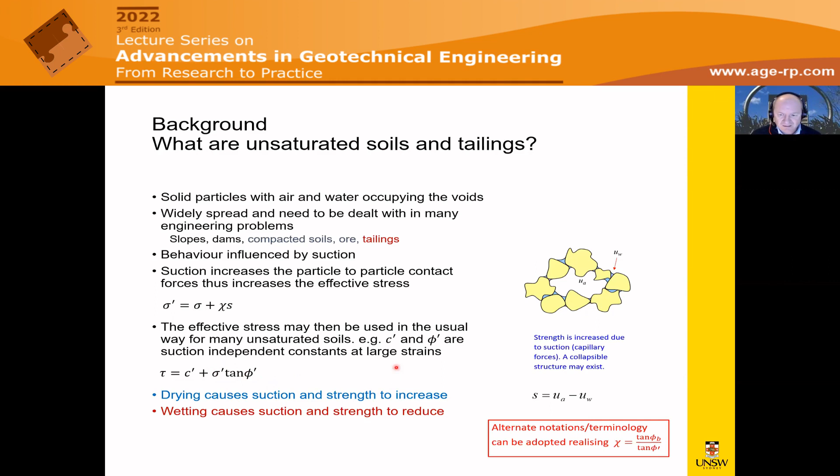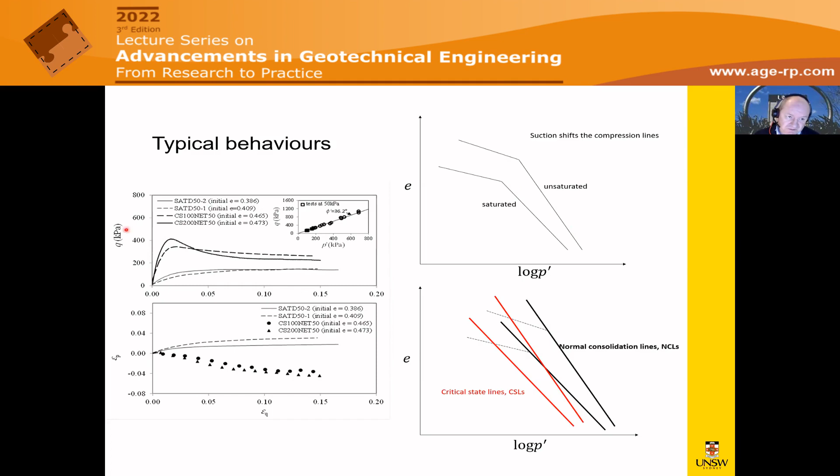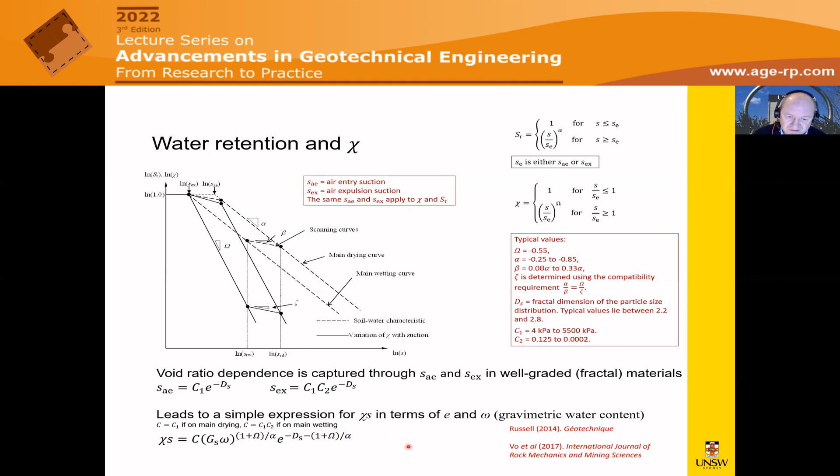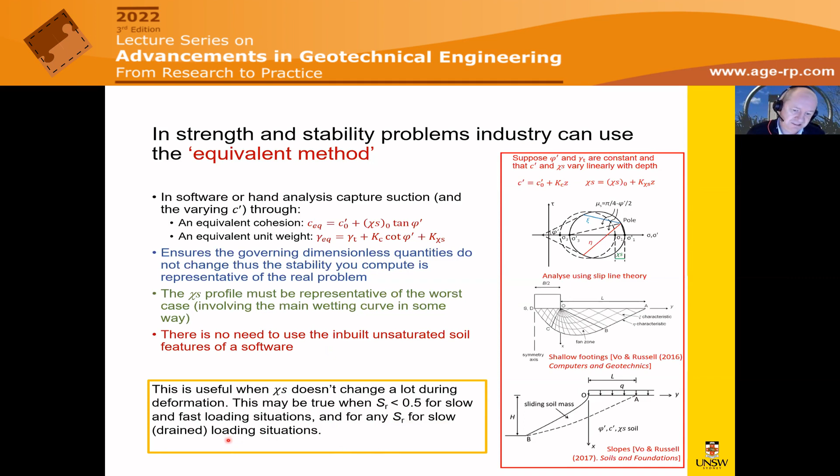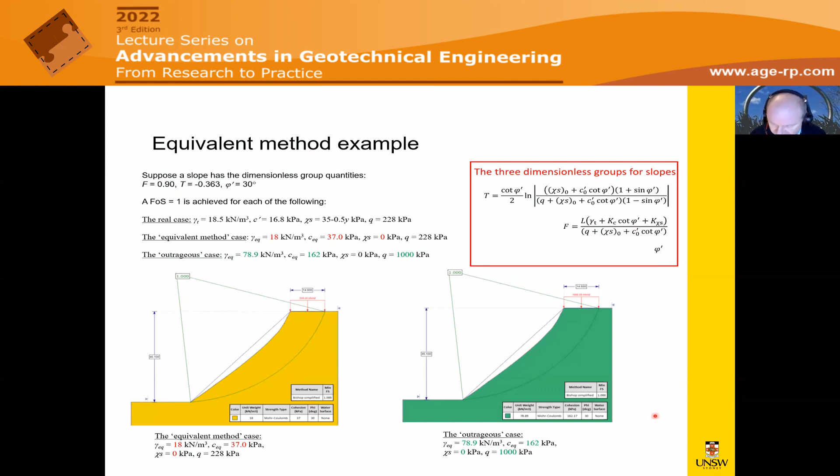And we can even put in an outrageous combination of properties. Here, the unit weight's nearly 79, the cohesion's 162, the surcharge has changed a lot. But all these 3 sets of numbers satisfy these 3 dimensionless quantities up here. And when you do your slope analysis, you get a factor of safety of 1, irrespective of which set of properties you use. That's because those dimensionless groups are preserved, highlighting that this equivalent method is a perfectly physically acceptable way to capture the effects of partial saturation in these strength and stability problems.

Now, back to the main topic. Why address the cone penetration test in unsaturated tailings? Well, large sections of a tailings storage facility are unsaturated. There might be sections deep within the structure where it is desiccated in the past and new tailings has been deposited on top, but it's just simply flowed over those dried out sections, and you still have these pockets of partial saturation. Or you can have large desiccated regions above the phreatic surface as well.

Very little research has been performed on how to interpret in situ tests of these materials, but I've spent the best part of 20 years looking at how to handle the CPT when we push through unsaturated materials. We know suction influences the CPT results a lot and must be accounted for.

And it's very important to account for suction in stability analyses and assessments, especially with tailings where the margins of safety are not high and the budgets required to retrofit and upgrade them are huge. So a little bit of factor of safety goes a long way financially, as well as from a risk point of view. It's important to remove unnecessary conservatism to keep costs down and attain slightly higher factors of safety, but also it adds confidence to your analysis. And we all know that how confident you are in your parameters dictates how low a factor of safety you might rely on when you present it to regulators.

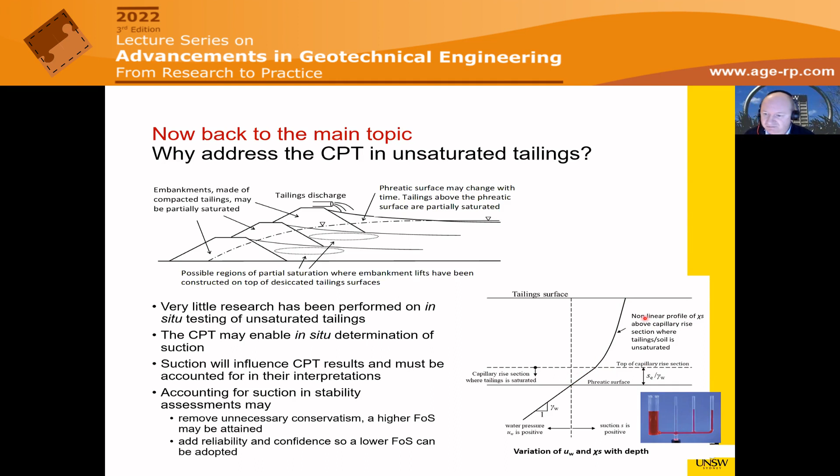Now let's go to some CPT observations. This is what we know for a clean sand. This is done a few decades ago now in a very basic calibration chamber, pushing cones into a sand in saturated and unsaturated states and so on. And you can see when the degree of saturation was around 0.1, your cone resistance is essentially double that for the saturated state. Very early evidence.

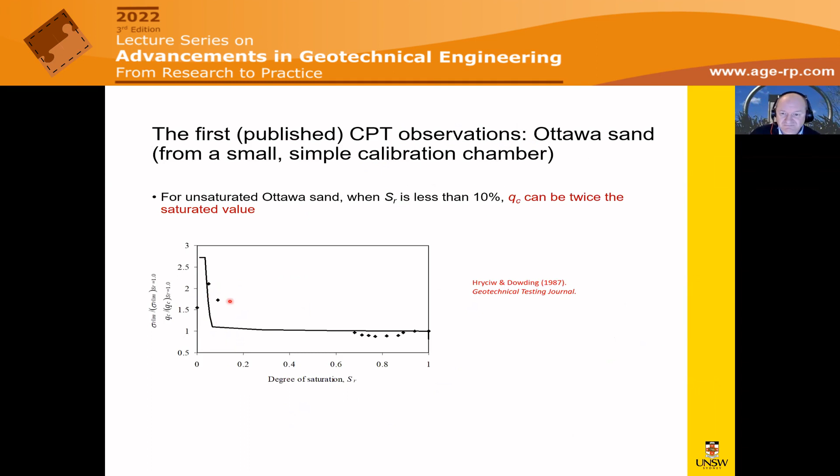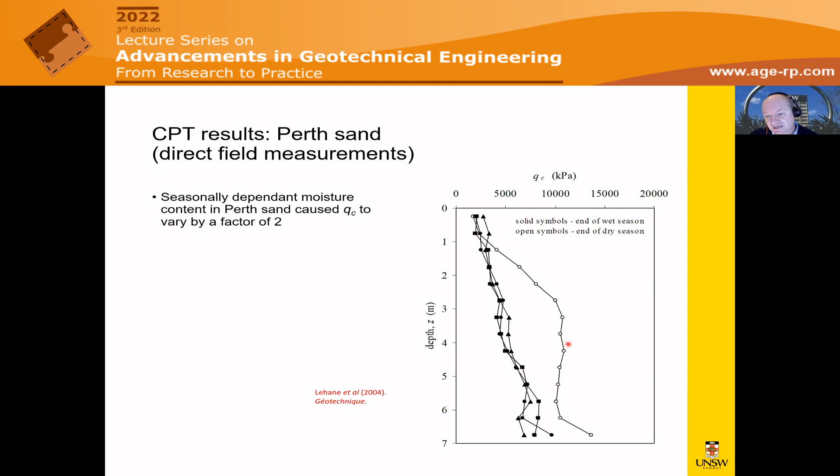We then go to Perth in Australia here, some field studies at the end of wet and dry seasons at a sand site where there's up to around 5% fines in that sand. At the end of wet season, all your CPT data is down here. At the end of the dry season, we've got a significant suction present in the sand, causing the cone resistance to double, more or less.

This is some work we did at UNSW in our calibration chamber, looking at sand in saturated and unsaturated states. Again, over on the left, you can see how your cone resistance, this outer sort of black line, is much larger for that unsaturated state compared to what it is for the saturated one over here. It's particularly pronounced when your confining stress is very low, but it's still evident when your confining stress is up to 100 kPa, your unsaturated results are still markedly different from your saturated ones.

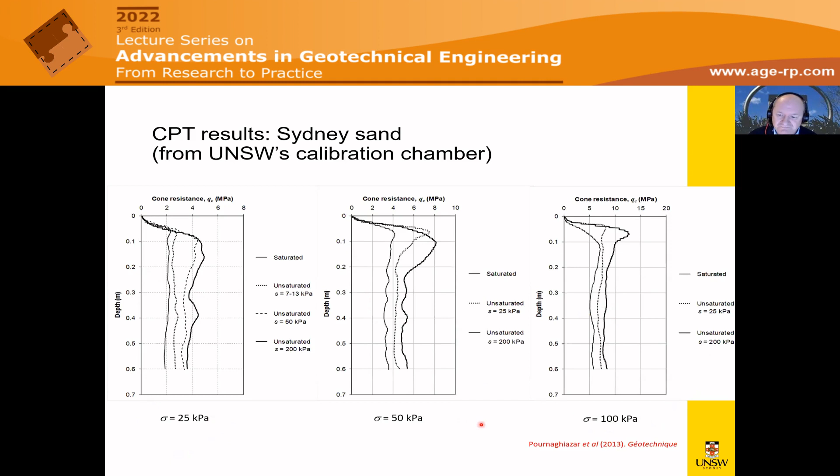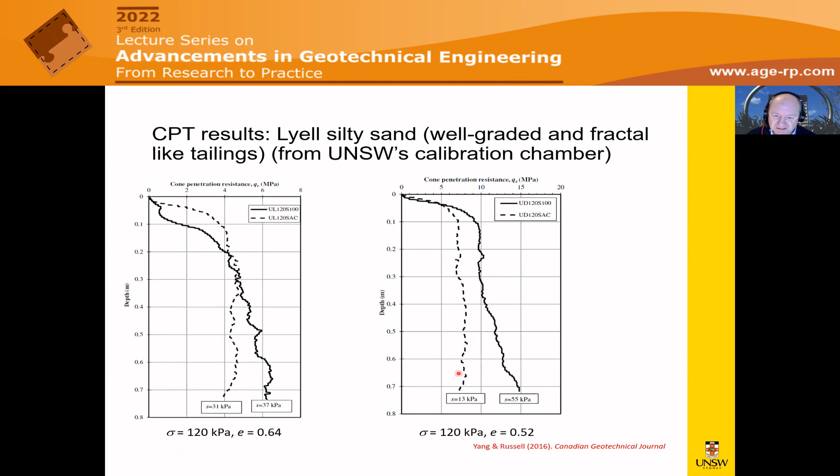We've done the same for a decomposed granite. This is very much like a tailings, a very well-graded sand silt mixture, perhaps a little bit coarser than tailings, but again, suction as it increases causes a rise in your cone resistance compared to the saturated value or the lower suction value.

Now let's talk about drainage. This is one of the key learnings that I hope you take away from today. Look, when we push things into soils or tailings, or when they deform, we need to make some assumptions or statements around what's happening to the pore water pressures.

Drained conditions will be great. It means that suction is constant, or even better, chi-S is constant. In other words, all the pore pressure parts and their contributions to the effective stress essentially don't change very much. But the most realistic scenario is that when we push a cone into the tailings or the soil, the moisture content is constant. It happens fairly quickly. There's not enough time for water to drain in to or out of the tailings.

So we analysed an expanding cavity in the soil to explore these different drainage conditions and what it does to the cavity wall pressure, which is analogous to the QC, the cone tip resistance. And we found a very useful discovery: the constant Chi-S assumption is a pretty good approximation to the constant W condition. The errors are always less than 30%, and mostly, overwhelmingly, less than 10%. So it's a pretty close approximation without big practical consequences, even though it's not perfectly true.

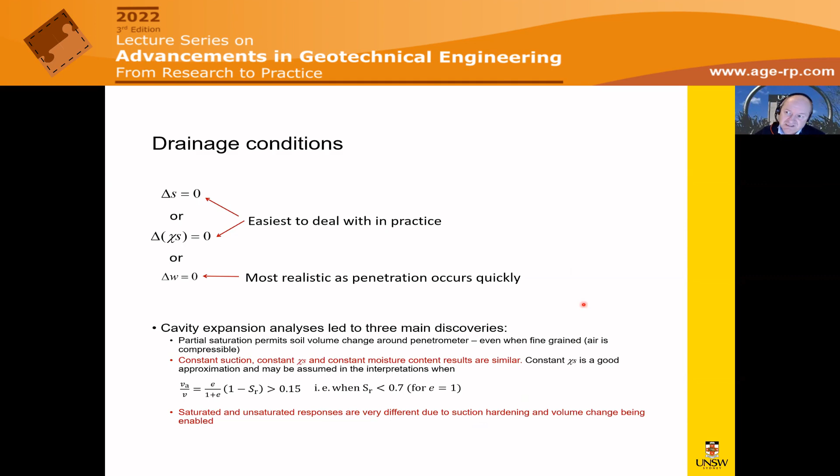So this is an interpretation of the Sydney sand data. This sand doesn't really have suction hardening. If it does, it's very, very small and can be ignored. And it means that all our saturated, unsaturated, and dry results essentially obey the same trends.

And we can link cone resistance to our mean effective stress in a power law, for example, using this Baldi type expression. That's all the data overlaid up here fitting that power law for two different relative densities. There's a mixture of saturated and unsaturated there, all agreeing the same relationships.

We could alternatively use the state parameter approach of Been, Jefferies and co-workers and adopt this sort of exponential law in terms of state parameter. Again, all your saturated and unsaturated data would obey the same trend. Now, these look very different, these two expressions, but they're actually essentially the same thing when you have drained conditions around a cone. You can introduce your critical state parameters and sub in the expression for the state parameter, rearrange, and you can show that this power exponent on P is actually 1 minus lambda m when you go to this Been-Jefferies type approach.

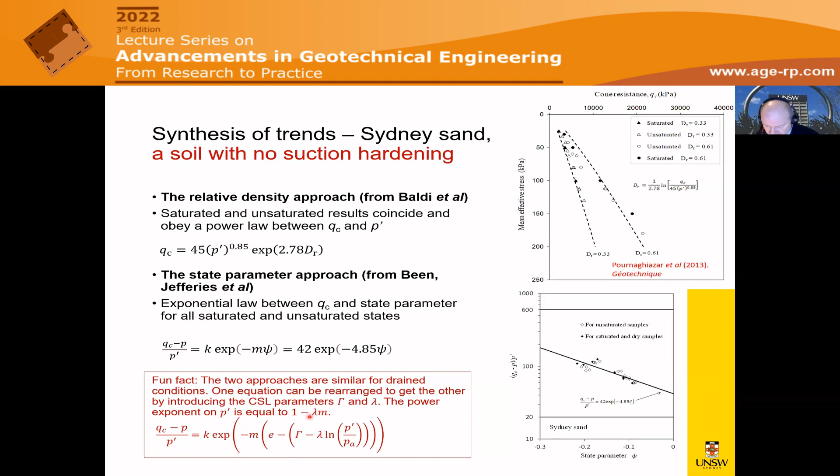Now, again, in this clean sand where there's no suction hardening, we can do some very powerful things with our cone results. We can relate two cone resistances at two different locations using just a ratio of the effective stresses, which are present when raised to that power. So we can put in Chi-S parts to account for the different suctions that might be present at two different locations. This is only true when the void ratios are the same.

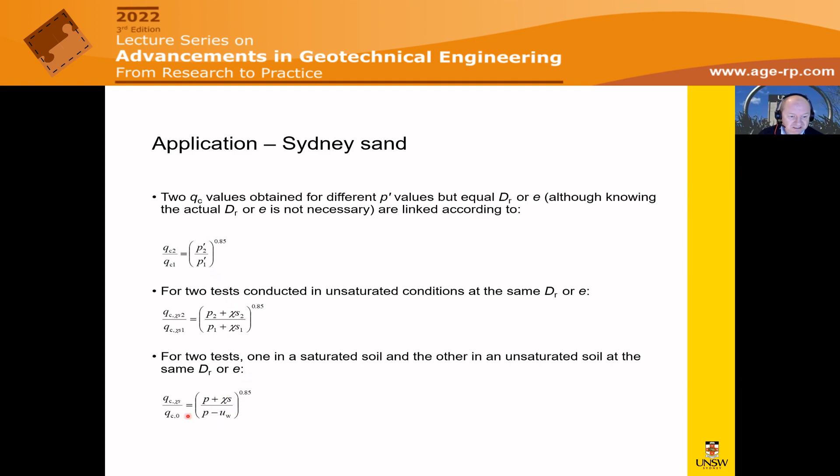We can even interrelate dry, saturated, and unsaturated results. So here's a little example. Given some basic information about the test, about the Sydney sand, we can suppose that a cone resistance of 4 megapascals was obtained. Let's now suppose that the total stress—the mean total stress—is 25 kPa and Chi-S is also 25. So doing things properly, computing your effective stress will give you 50 kPa. Subbing in the various expressions, you get a relative density of 0.42, friction angle of 39 degrees, soil behavior type of 1.6, and so on.

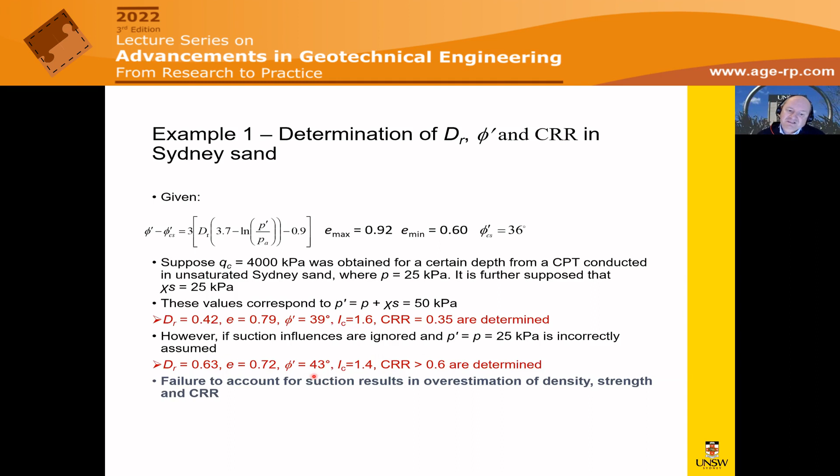But if we ignore suction, making no attempt to account for Chi-S and incorrectly suppose our effective stress is our total stress, which is 25, we would overestimate our friction angle by 4 degrees, overestimate our relative density or underestimate our void ratio by quite a bit, and so on. So here, failing to account for suction leads to unsafe predictions as well.

Another example, at the Perth sand site, we can interrelate the cone resistances essentially at the end of wet and dry seasons. At the end of the wet season, I'm setting the pressures to 0—there's still a small suction present, but it's all at 0 or close to it—compared to the end of the dry season. Interrelate them, and you can back-calculate the Chi-S value at the end of the dry season when you've got two sets of data side by side.

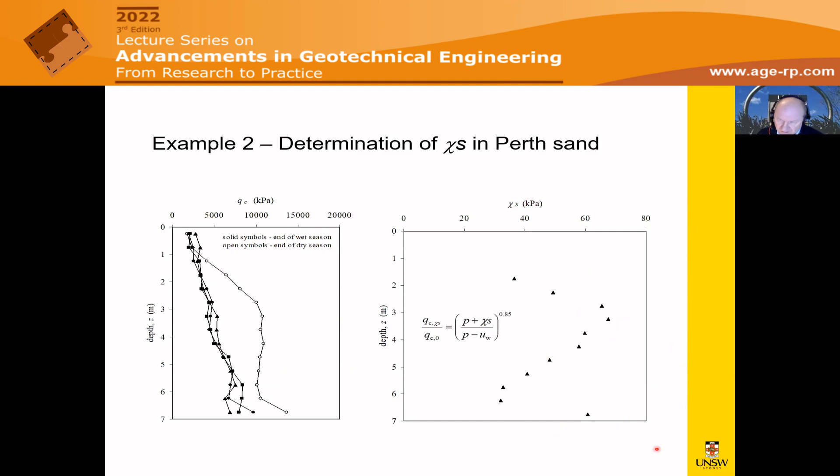Now, when we add fines, we start to get a very pronounced and unignorable suction hardening that we have to account for. And in an unsaturated state, we still get a nice power law relationship with our mean effective stress, but that relationship won't apply when the soil is saturated. So we've got two different types of responses now around the cone, and that's due to the presence of suction hardening.

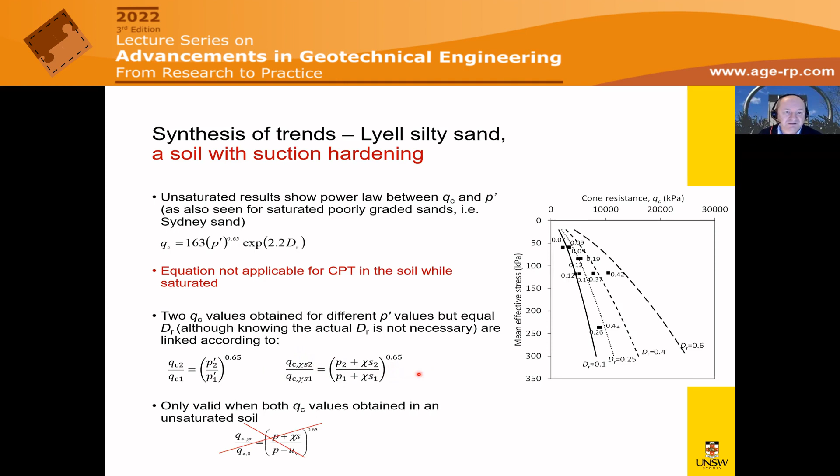It limits a little bit how we can then interrelate different sets of cone results. We can only interrelate them when both sets are from an unsaturated case, using a similar approach to Sydney sand, but we can't now mix in the saturated ones because of the different laws which apply. But there's some implications when we attempt to classify as well, using these well-known charts.

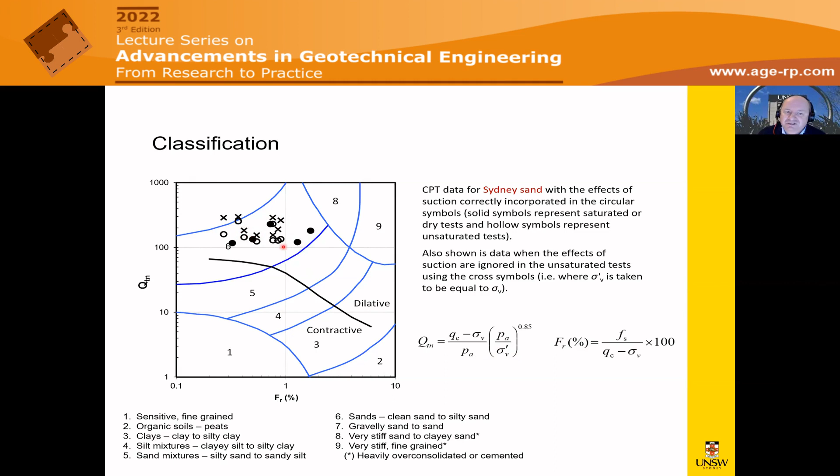The effects are not so pronounced for the Sydney sand, and I'll demonstrate that here. So the solid circle symbols are saturated. The open circle symbols are unsaturated, but correctly plotted. This is the Q term. Notice that there's an effective stress on the denominator here, so chi-s has been included in that properly. I've redrawn the data, but when the chi-s part is assumed 0, or in other words, when the suction is ignored, you see the crosses now are wrong, but they're plotting slightly above what the open circles do. It's not a huge difference for this particular soil, but for other soils it can be.

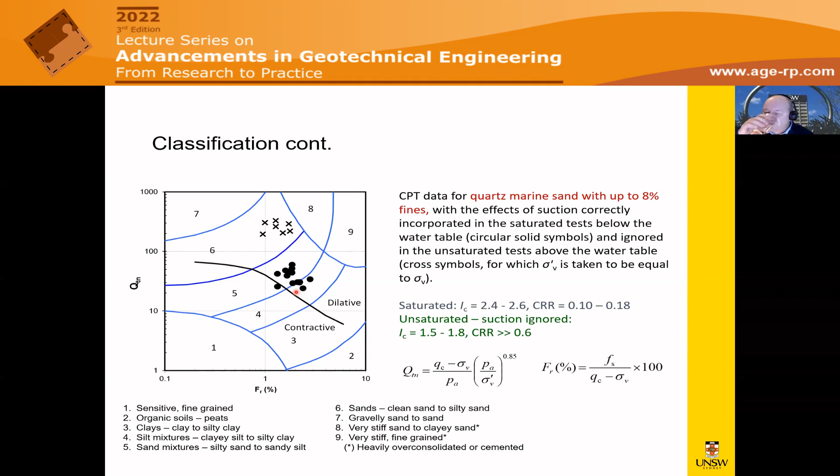And this is a quartz marine sand. Here I've done the same things. Saturated results all nicely and correctly plotted down here with the black closed symbols, showing slightly dilative material bordering between 4 and 5. Now, in the unsaturated case, suction was ignored, but look where the data's plotting. It's the same soil, but now it's plotting as a soil 6. It's looking to be very, very dilative, but we know that if it was to become wet for whatever reason, it would be down here where these black dots are, bordering like dilative, contractive. So you get things badly wrong with your classification.

Okay, so now on to tailings.

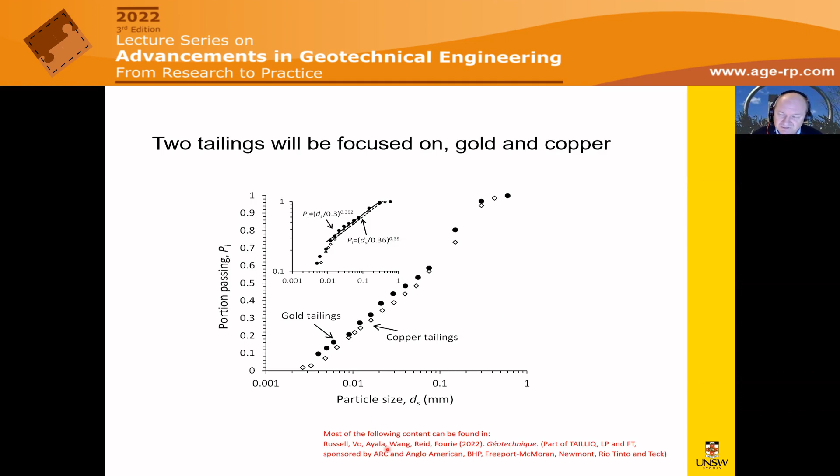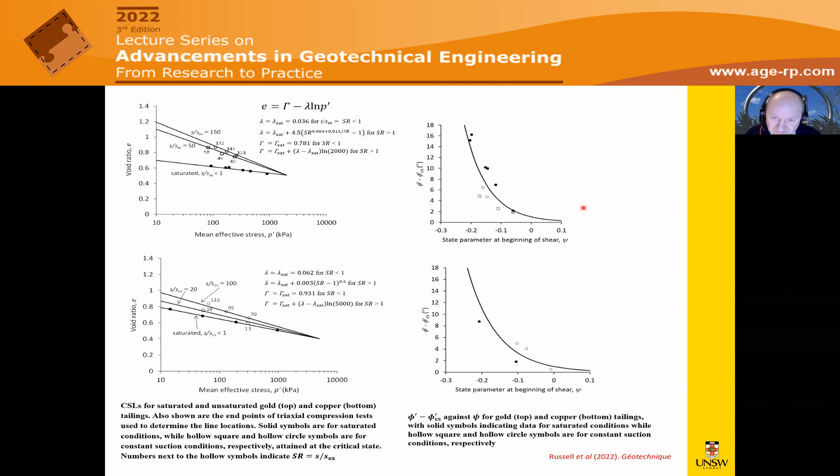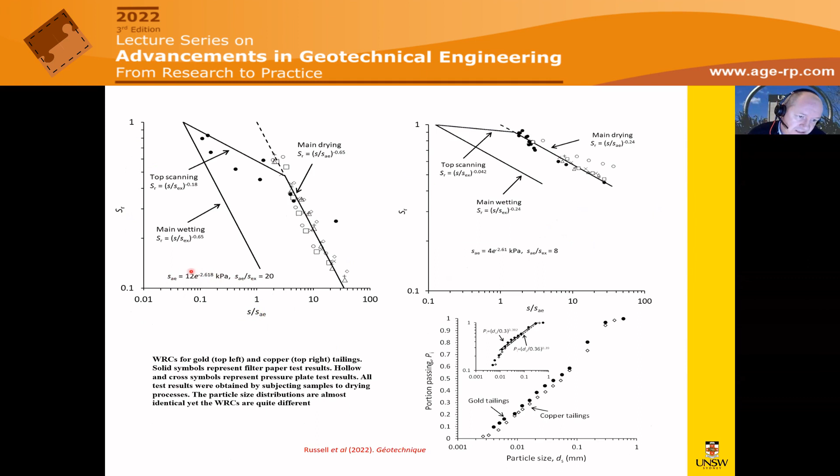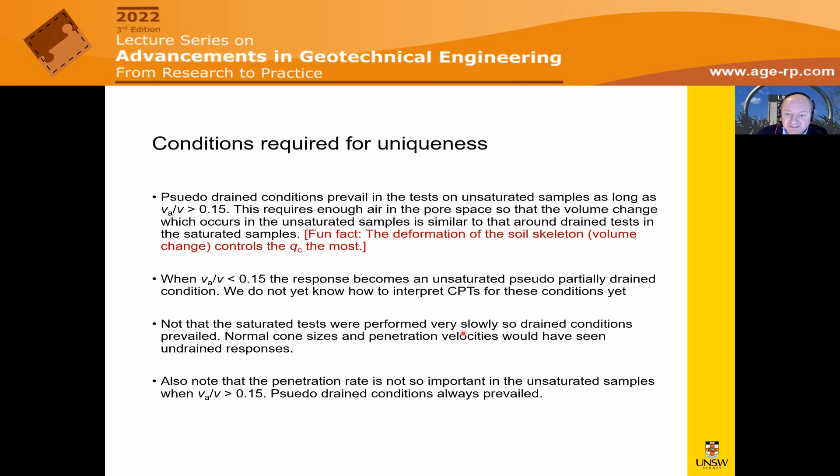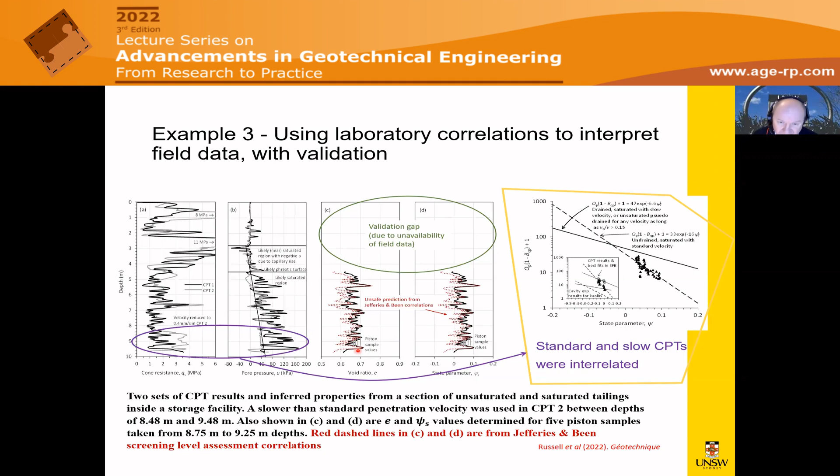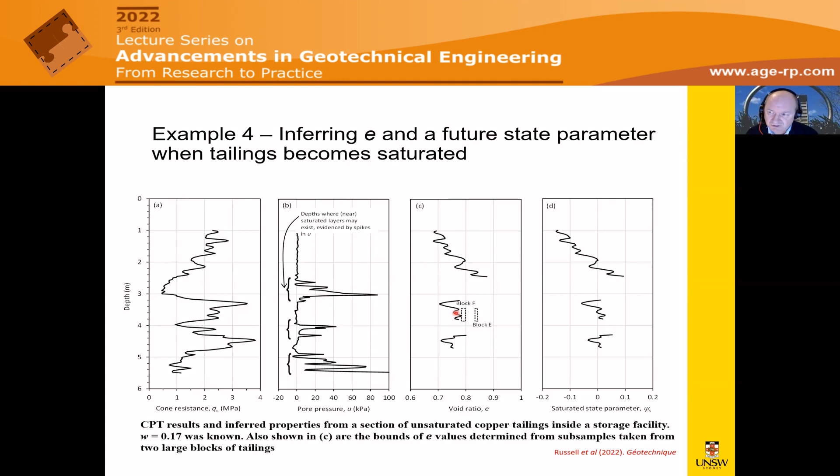Now, all that requires a bit of knowledge around suction hardening. I must state that the state parameters in these figures are determined using that shifted critical state line, which depends on suction. To determine that requires quite a lot of laboratory testing using sophisticated equipment, which is generally not available to industry. So I'm very conscious that this pure, perfect interpretation is not easily done in practice.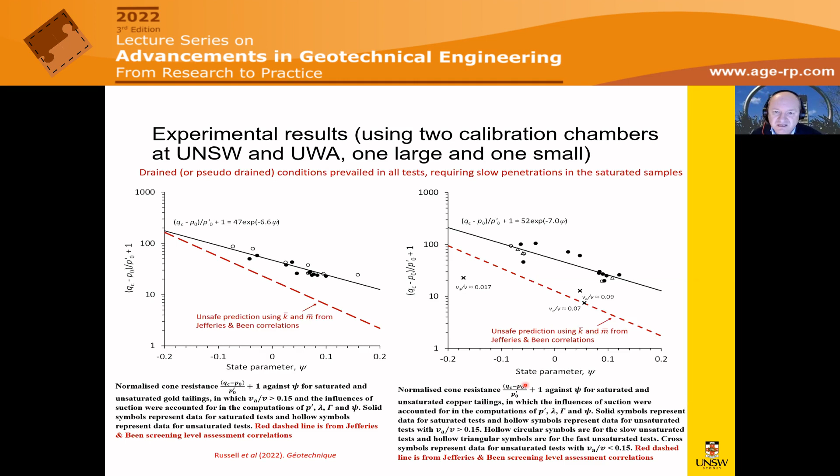Now, these relationships are valid when we have an air ratio larger than 0.15, and when the hydraulic states on the water retention curves are at the midpoints of a scanning curve. So they're not on the main drying curve, they're not on the main wetting curve, they're exactly on a scanning curve at the midpoint between those two outer boundary lines.

The same is shown here on the right for the copper tailings. Now, you could recover these if you've got a huge amount of data from your tailings dam. You could essentially put all your dots on a graph here and then draw some contour lines of best fit through it and try to shape it into forms that look a bit like this. Then you can go forward and apply those more generally across your structure.

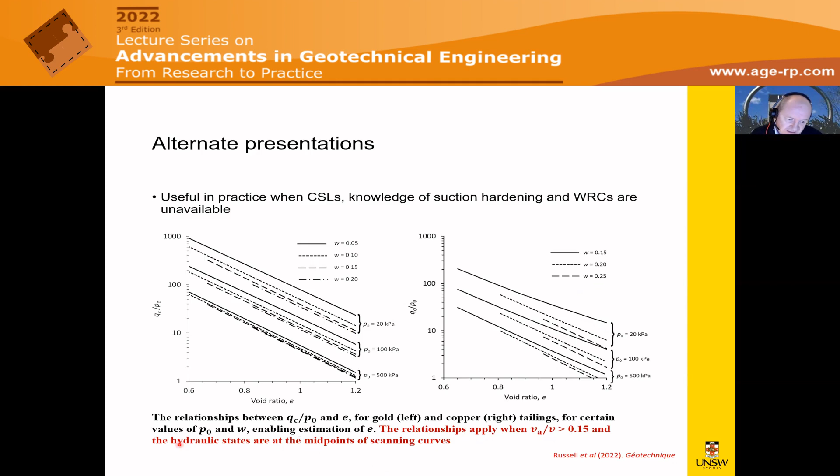Now, this is a fairly key assumption, that the hydraulic state is at the midpoint of the scanning curve. And why am I assuming that? I think during normal seasonal cycles of wetting and drying, it's really difficult for your hydraulic state to ever end up on the main drying curve or the main wetting curve. In fact, I think it takes very unusual or prolonged wetting or drying, so extreme floods or droughts, to actually cause that to happen.

During normal operations, I don't think you ever end up on your main wetting or drying curve. You're always hovering on a scanning curve, zipping back and forth between your main wetting and drying, never actually reaching it. There's a little bit of direct evidence of this as well, though not a huge amount. I think it's something we need to get on top of as a discipline to help the uptake of unsaturated soil mechanics in practice.

We had two years of monitoring data in New Zealand on a soil slope. These outer black lines are laboratory determined water retention curves, and these grey symbols are field measured values during wetting and drying over the two-year period. You can see they always essentially just zigzagged back and forth on the same scanning curve. You never saturate the soil to the extent that the degree of saturation becomes 1, nor do you ever dry it out enough to move further down the main drying curve.

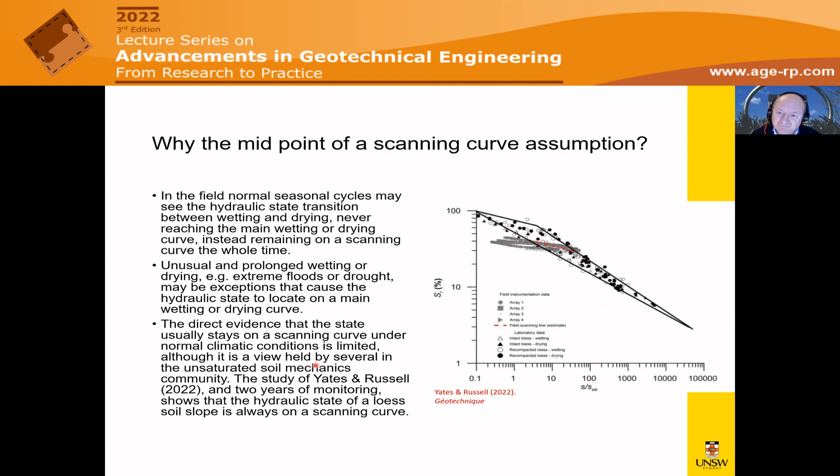I won't go through this, I'll let you read that in your own time.

You trap the air and water in the pore space so it can't enter or exit - a closed constant mass system. We can calculate the pore pressure changes in the pore air and pore water, compute chi-s, and calculate our effective stress properly. But you get responses that look a bit like what you'd see for a saturated undrained material - an increase in strength and then some softening as you approach a critical state. Obviously there's the ability of this material to compress in volume because the air deforms - air is very, very compressible compared to solid and water.

We can start to pick off things like collapse lines and relate them to degree of saturation, for example. This is well known for those who deal with static liquefaction generally.

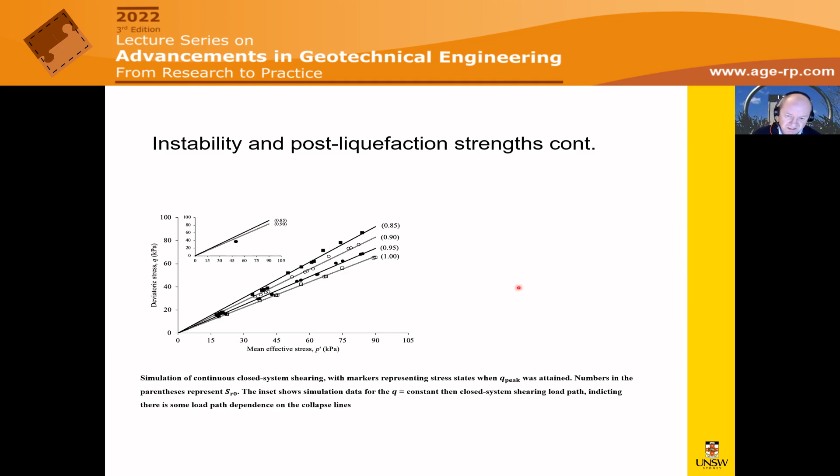So there's a bit of work to do here to understand that load path dependence, but it looks like we can start to apply some of the basic ideas for saturated soils to unsaturated ones as well, once we get on top of that load path influence.

We can also start to plot things like post-liquefaction strength ratio as a function of the initial state parameter. There's a little bit going on here, but these square symbols are experimental measurements. This line is a model prediction for a degree of saturation of 0.65, this dotted one is for 0.85, and so on. Again, this is plotted in terms of the state parameter, which accounts for that suction hardening effect, which, as I said earlier, might not be something industry can do.

So we can also plot it in terms of a modified state parameter, which is really the state parameter determined by ignoring suction and relying just on the saturated critical state line - something industry can do. We can come up with some alternate charts there. Here again, model simulation at 0.65, and some dots for lab data and so on. So it's work in progress, but this is where we're heading with incorporating suction into post-liquefaction strength.

Now, some of the big mining companies are very aware that it only takes a degree of saturation of 0.8 or so for liquefaction to still be possible, and they're asking their consultants to now deal with that in their designs. The consultants generally don't know how. I don't know how - no one does - but we're now making some steps towards helping them so we can deal with that.

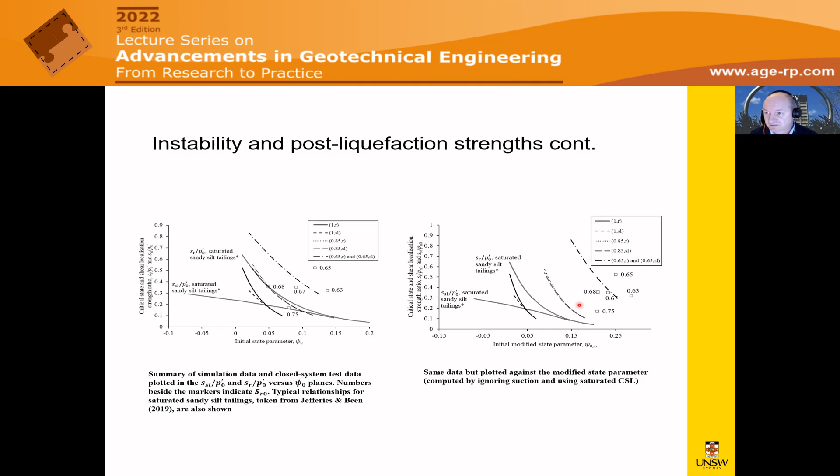Anyway, here's a neat summary for the practitioner, so please share this around.

It relates to that groundwater pressure system set up inside the tailings, saturated below the phreatic surface, with capillary rise immediately above. In that capillary rise section and below, we can use saturated soil mechanics, but we have to account for the negative water pressure present in that saturated capillary rise section.

That negative water pressure appears in the denominator of a CPT interpretation, and it appears in the denominator of a strength ratio. So you really have to account for it. Otherwise, you're going to get misleading interpretations from your CPT, or a misleading undrained strength in your stability analysis, and so on. We can still apply Skempton's A parameter, B bar, and do all the usual things.

Above, near the top, where we've got that high air ratio, larger than 0.15, we can use either unsaturated soil mechanics or this equivalent method in total stresses. But we need that chi-S profile to get our equivalent cohesion and unit weight. The tailings will behave as pseudo-drained because there's enough air present so it can deform whatever the loading rate, so that chi-S is essentially constant.

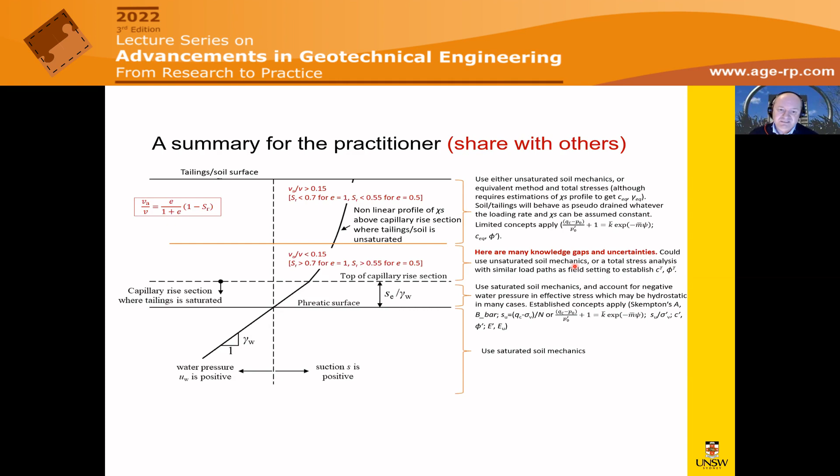But there's a large section where we still don't quite know what to do, and that is when the volume of air ratio is less than about 0.15. Here we could use unsaturated soil mechanics, or perhaps a total stress analysis using some total stress strength parameters, CT, phi T, but we have to make sure they're recovered from essentially the same load path that we're expecting to experience in the field, because those parameters are very much load path dependent. So we need to be careful there. This is probably the best we can do right now.

Look, I threw this slide in knowing there's a large industry contingent. This is the mistakes that I'm seeing in industry in Australia. A lot of companies are now using unsaturated soil mechanics in infrastructure designs, following some recent policy changes by our government departments. So there's a frenzy of people doing it, but they're still making mistakes. I put this here so you don't make the same mistakes when you go and have a go.

People assume total suction contributes to strength, irrespective of the individual contributions of matric and osmotic components. In some of Australia's soils, there's a big osmotic component due to the presence of salt. The Australian standards don't really differentiate between the two, which I think is quite misleading. So just stick to matric suction as much as you can. Generally, the osmotic part doesn't do much to the mechanical behavior. It does a little bit, and we don't really know how much, but it's the matric part that does most of the strength changes.

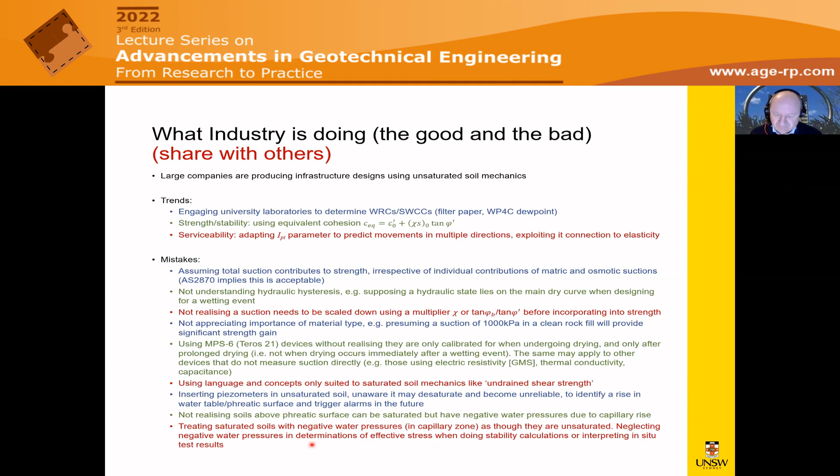Too often people are ignoring the capillary rise above the phreatic surface and the enhancements it gives to effective stress. Yeah, so they're the main ones. Good luck with it all.

Here's my conclusions. For strength stability, use the equivalent method - that's fine when your cohesion suction increase is linear with depth, at least approximately. That's the way to go, and you can resort to commercial software without using the inbuilt unsaturated soil features.

The rest is there: with a large air ratio, 0.15 or more, you can use this equivalent concept quite well. Chi-S won't change much, whatever the deformation type. But when your air ratio is less than 0.15, we've got a really complicated system - we don't really know what's going on there. You could resort to a total stress type analysis as long as your load path is similar to what you have in the field.

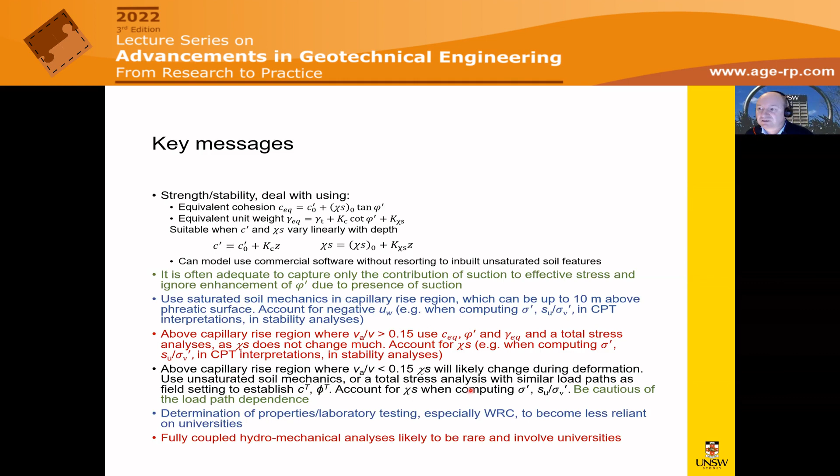But look, yeah, that's all I've really got to say. Good luck, and happy to answer any questions.

If they're contractive when partially saturated, you've got real problems. Normally it's the opposite - if they're unsaturated, they tend to look dilative, even though when they get saturated later on, they're very contractive. So for something to start off looking contractive while also being partially saturated, it's going to be extraordinarily unstable when it becomes wet later on. In fact, you'll probably get instabilities as soon as the water table rises and saturates the material - you'll get volumetric collapse and all sorts of things going on.

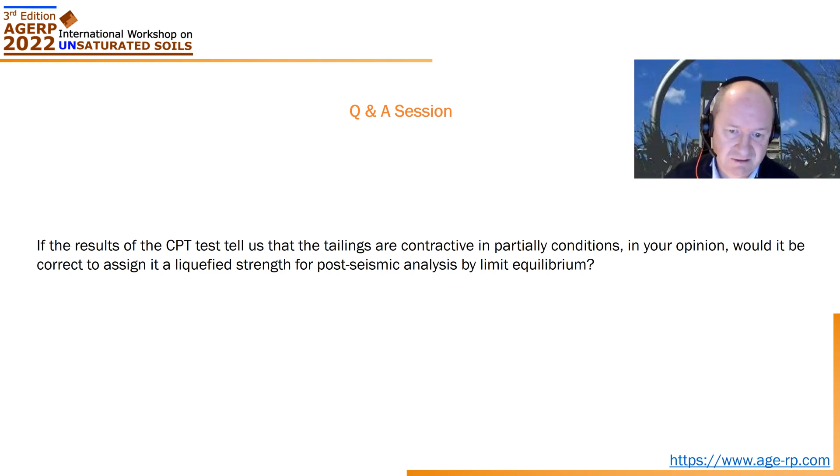Yeah, so what strength do you put on it? Something very, very small. It'll be around the lowest that's ever been observed historically, around that 0.06 ratio mark. So yeah, if they're looking contractive when partially saturated, I'm in all sorts of trouble there. That's a good question.

There was about 3 meters of penetration in that unsaturated region. I don't know the details of exactly what they did on site, but these were reliable contractors - I'm pretty sure they would have been using glycerine or something equivalent in the pore fluid in the piezometer tip, plus the rubber protection we put over it.

Now it will desaturate only really through cavitation, and for that to happen you would need at least like 100 kilopascals of suction for it to occur. That level of suction may or may not have been present. I'm guessing, with all those other protective measures, by the time the rubber breaks away and so on, you probably have the tip exposed to a suction that's not 100 kilopascals, so it won't desaturate. The fluid in the tip can hold 100 kilopascals of suction before it begins to desaturate.

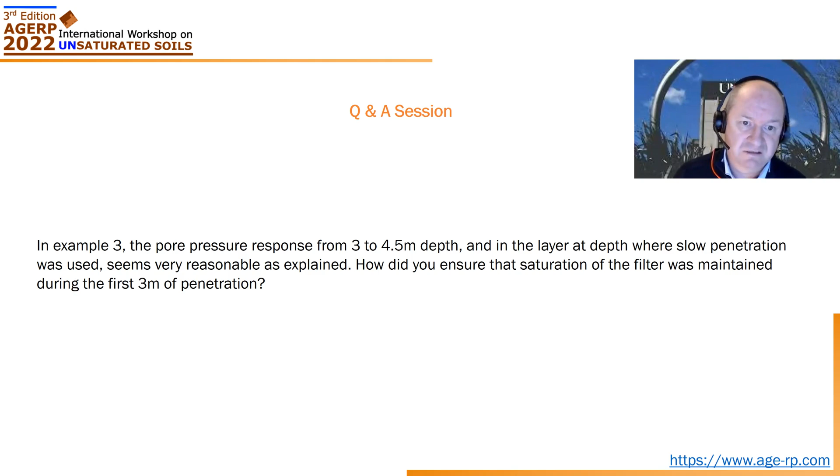This is about the critical state line in the Q-P plane. I didn't mention it, but generally, as long as you put your suction into the effective stress P properly, you see the same critical state line in that plane - the same M slope for both saturated and unsaturated conditions. There might be small differences here and there you can argue about, but practically speaking, they're the same line for both saturated and unsaturated conditions. There's a lot of data that proves this, to the point where it's not even a controversial point of discussion anymore. It's pretty well accepted.